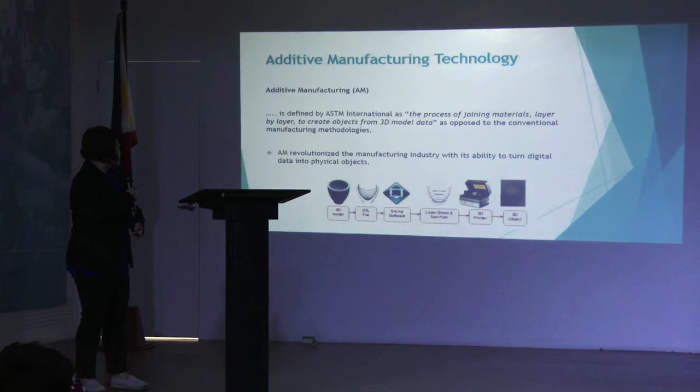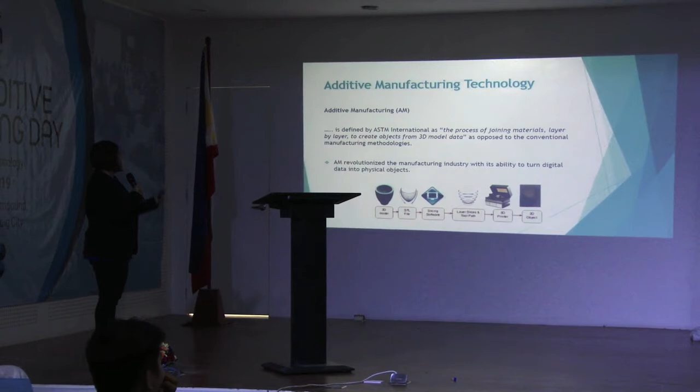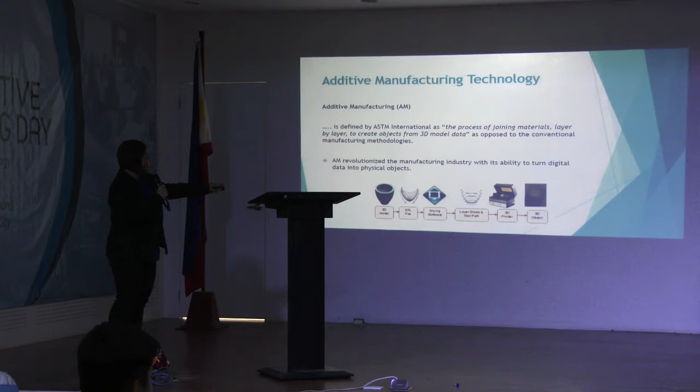I'll be presenting different case studies on additive manufacturing in different disciplines or fields. So, pasadahan ko lang po. So, just a review, additive manufacturing is defined by ASTM as the process of joining materials layer by layer to create objects from a 3D model. So therefore, from digital data, you convert it into an actual 3D object. So that is one revolution in the manufacturing industry.

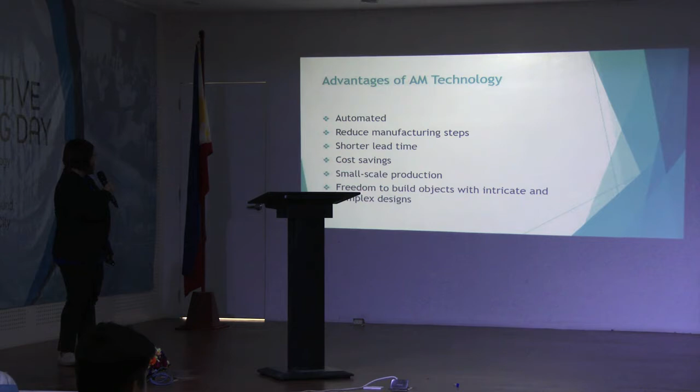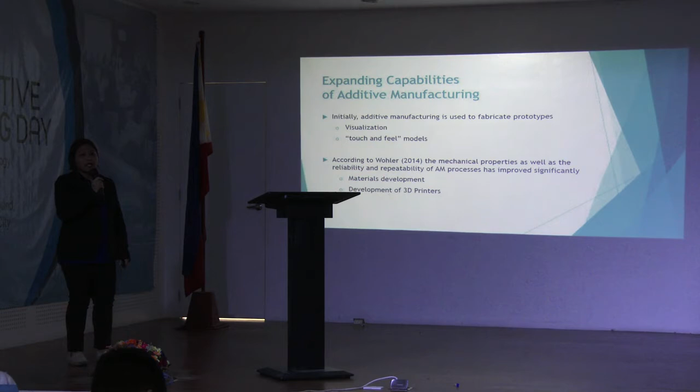So the advantages of additive manufacturing are it is automated, it reduces the manufacturing steps, shorter lead time, cost saving, small scale production, and of course you have the freedom to build complex designs. Over the years, nagkaroon ng expansion ng capabilities of additive manufacturing. Initially, it was used for the fabrication of prototypes for the purpose of visualization and touch and feel models. However, through recent advancement, nagkaroon din ng expanding capabilities wherein, according to Wohler, the mechanical properties, the repeatability and reliability have significantly improved over the years.

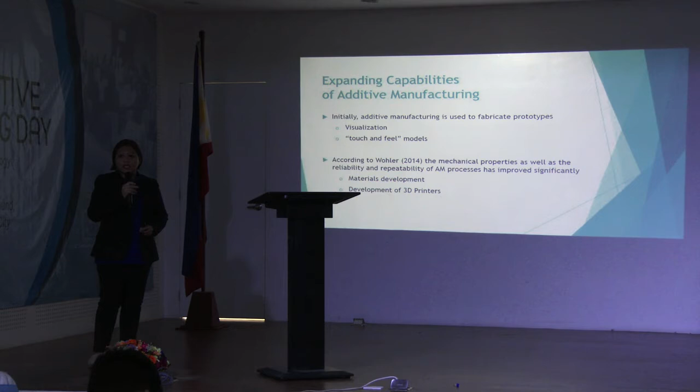It's due to materials development. Yung mga unang generation ng additive manufacturing, nakalimit lang yung materials nila to polymers. However, yung mga bagong generation na ng 3D printers, they are capable of printing materials made of metals and ceramics. And even yung mga bagong generation ng 3D printers, they are capable of producing multi-material objects and composites. And of course, nagkaroon din ng advancement ng mga 3D printers. So marami ng types sa bagong models ng mga 3D printers.

So therefore, since nag-expand yung capabilities ng additive manufacturing, na-extend din yung application niya, usually for industries that produce high-value products, such as aerospace, automotive, defense, medical, and consumer electronics. So there are a lot of case studies that you can find online in literature, but I chose these case studies which I think have significant impact on various industries.

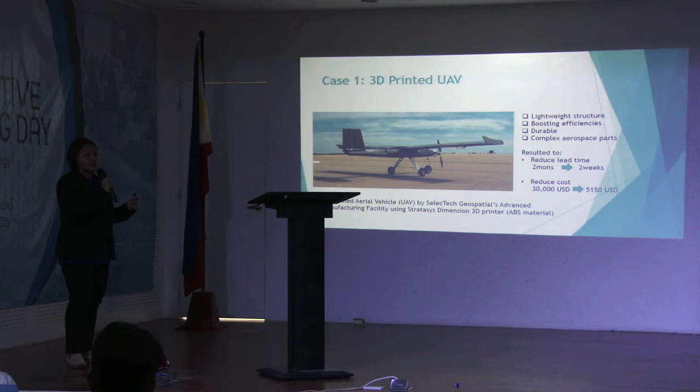And of course, the cost of fabricating this UAV has significantly reduced from 30,000 to 5,150 USD. It's because yung conventional way of fabricating a UAV requires a lot of tooling, machining works, and designing. But when it comes to 3D printing, you can print the material directly without any need of machines or tools.

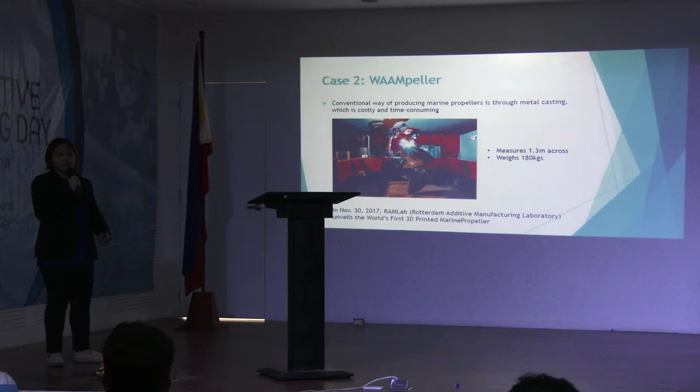Now, the second case is the creation of the WAAMpeller, which is actually a propeller for marine applications. As you know, the propeller is one of the important components of building a ship. So, usually yung conventional way of producing it is very time-consuming, at saka it requires a lot of engineering works. Kasi just the same, kailangan mo ng machine and tooling works for you to be able to produce the propeller. So, the WAAMpeller was produced by RAMLab on November 30, 2017, which is the world's first 3D printed marine propeller. It measures around 1.3 meters across and weighs around 180 kilograms.

Now, WAAMpeller is actually para kang nag-weld ng wires of nickel aluminum bronze alloy. So most 3D printers use powder metals. In this technology, they use wires, parang continuous filament, and then they weld and fuse them together until maka-form siya ng propeller. And then they were able to test it and compare the performance of the conventional propeller and this WAAMpeller. And so far, in terms of performance, comparable naman, and it underwent rigorous testing, and fortunately it was able to pass the Bureau Veritas testing.

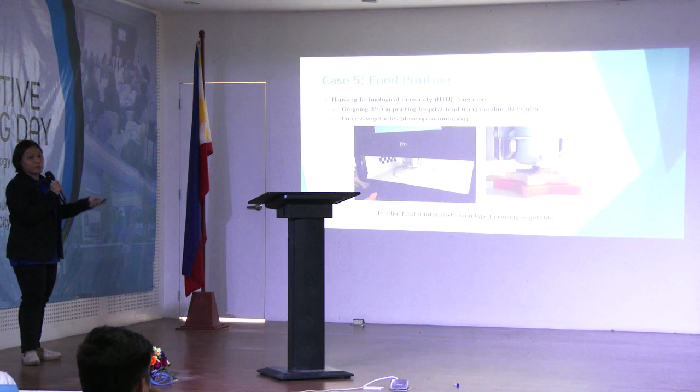And last is food printing. There are many food printers now; normally they would use them to print chocolates. But at NTU, they use it to produce hospital foods. Usually these hospital foods are given to patients who can no longer eat using their mouths, so these are easy to swallow. But of course, they still need to process this food, usually vegetables, and they developed their own formulation so it is printable in a 3D printer. The printer that they use is the Foodini 3D printer. It's an extrusion type.

So, as for the future, as I mentioned earlier, additive manufacturing is not yet mainstream, but once it penetrates the big industries with high value products, 3D printers have to be subjected to certification, standardization of methods, and of course regulation or policy making, especially when it comes to weapons and illegal firearms. So, thank you for listening.